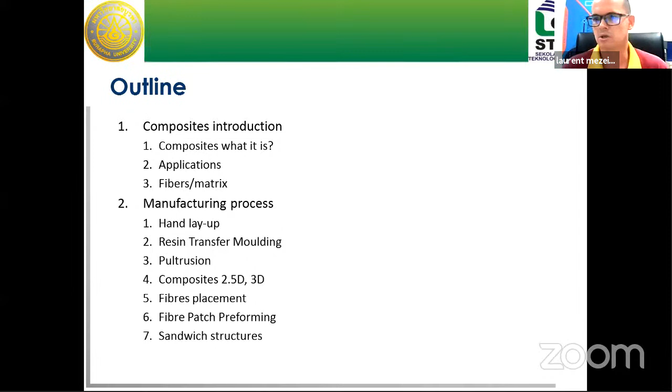So firstly, a short introduction of composite. So what is the composite and what is the meaning when we talk about composite?

So composite is a non-homogeneous material. It's a combination of different materials, but the speciality of composite is you combine two materials A and B, and in your composite, you can always see or distinguish component A and B. You don't merge them, you assemble two different materials.

And why do we do this? Because most of the time we want to improve the mechanical property and decrease the mass. In industry, mass is money. So it's very important to always decrease the mass of your product and improve its properties, mostly mechanical, but it can also be electrical property or cost.

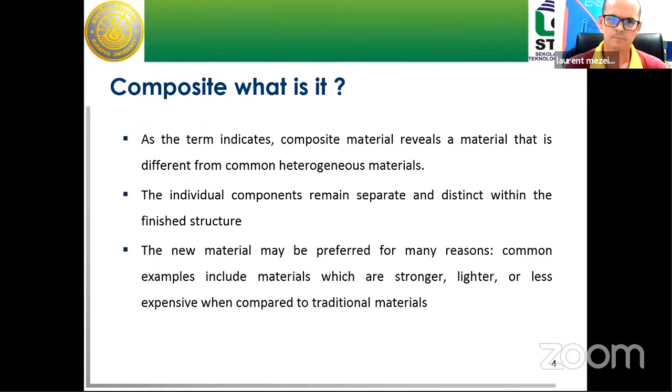Composite is not new. One of the most famous uses of composite in history is the Mongol bow in 1200 BC. Mongols already used composite to produce their bow. They used the appropriate material at the appropriate location in the bow to improve its properties. So composite is totally not new.

But in terms of engineering composite, the most famous composite is concrete. Concrete is cement plus aggregate, which can be crushed rocks, and rebar to reinforce the concrete. So concrete is a composite.

You also have metal matrix composite, MMC, mainly used in engines and machining tools. You also have ceramic matrix composite, CMC, mainly used in hot applications where temperature is very high, for example high performance brakes for sport cars or aircraft, or also in aerospace engines.

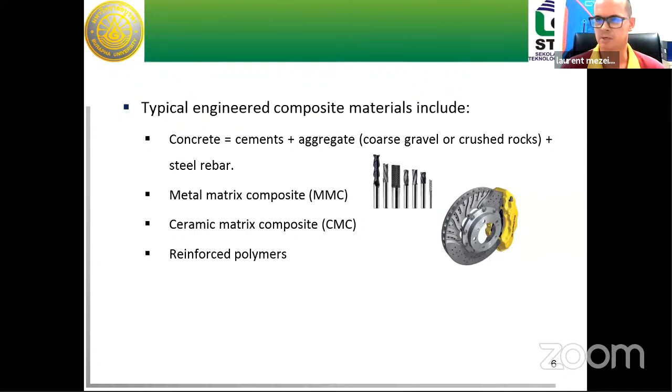And the last family of composite is reinforced polymer, which I will detail now. Reinforced polymer consists of one polymer, which I will sometimes call matrix, reinforced by different reinforcement particles. These particles can be long fiber, short fiber, or small particles.

So you have three types of reinforcement for the matrix. Today, in this presentation, I will present only the manufacturing process for long or continuous fiber. I will focus on this one: FRP, fiber reinforced polymer.

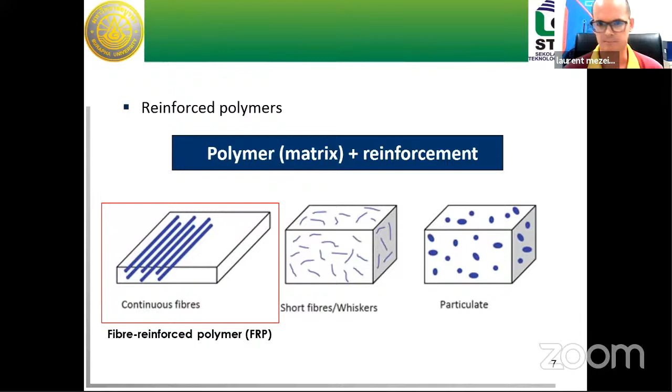You can see on this microscopic observation of fiber reinforced polymer, we have two components. Component A is the fibers, component B is the matrix. So the composite is made by these two components, fiber and matrix, but at the end you can always see component A, the fiber, and you can see the matrix. So you can distinguish the two components, okay?

What is the advantage of this type of composite, the FRP? It's light compared to metallic material, about 1.7 for the density compared to 7.5 for steel and 2.7 for aluminum. The ratio of strength over modulus is pretty high, higher than for metallic materials, because the density is very low.

And one advantage is that as you use fiber, you can choose the direction you reinforce. So you can choose the direction you want stiffness. So you can optimize your product.

The inconvenience or drawbacks are that it's more expensive than metallic. The manufacturing is very different, so you cannot switch from metallic process to composite process. It's two different worlds, and it's a little bit higher in terms of cost compared to metallic machining, traditional machining.

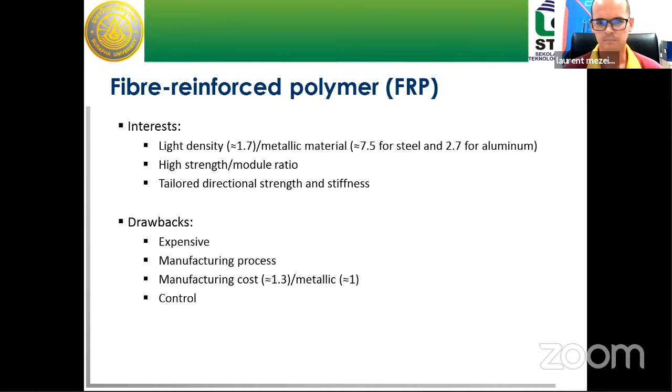Applications: basically, you can find composite in sport products, golf, baseball, cricket, surfboard. You can find it in transport, automation, bus, subway, train, automotive, sport automotive cars. Aerospace uses a lot of composite because it's very light and strong. And energy, especially for wind blades, for energy production, because it's light.

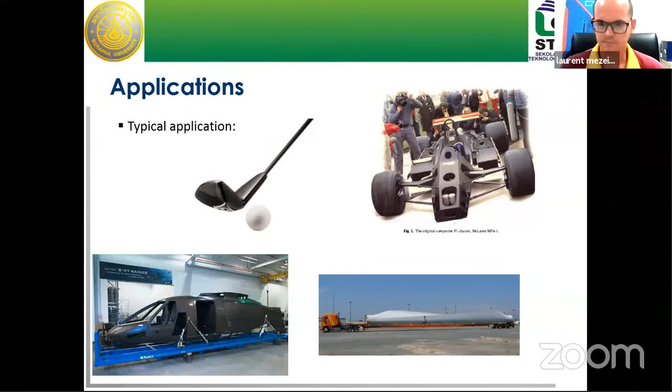Briefly on composite, the fibers used in FRP: you have three main fibers. Carbon fiber has a high mechanical property, so the strength is very high. It's mainly used in structural applications like aerospace fuselage, aircraft wing, sport automotive frame, applications where you need to save mass and be very strong, but the cost is also expensive for carbon fiber.

In contrast, you have glass fiber, really cheaper, with dielectric properties and excellent chemical and corrosion resistance, but the stiffness and mechanical property are really lower, really lower than carbon fiber. So glass fiber cannot be used in structural applications like aircraft fuselage, it's not strong enough and it's too heavy, but glass fiber can be used in cheaper applications.

And the last fiber is aramid. The commercial name is Kevlar. So Kevlar is the commercial name, the product is aramid. Aramid fiber is very good for impact, so it's very tough. For all applications where impact resistance, chemical resistance, and fatigue resistance are required, aramid fiber is a good candidate.

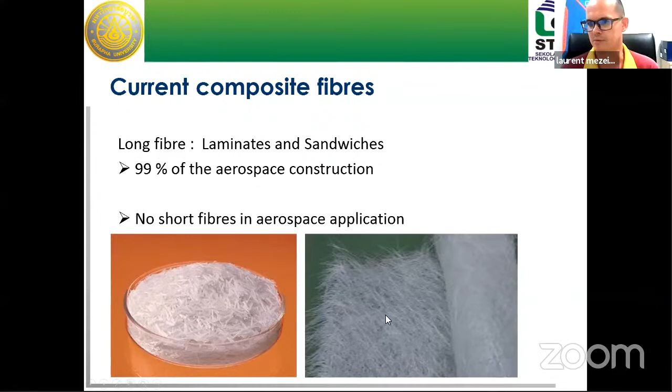In terms of fiber, you can find long fiber or short fiber. Long fiber is mainly used for structural applications, so aerospace uses only long fiber. Short fiber, as you can see on the left picture, is a few centimeters in length. This is glass fiber, the white color. The mechanical properties are very low, so it's basically used in a swimming pool. So application where property is not the key.

Something very important in fiber reinforced composite is the different scale from the fiber to your final product. The basic element is the filament, and the size is in micrometers. Typically the diameter of the filament is 6 to 10 micrometers, so it's very, very small.

Then you combine this filament to obtain a yarn or tow. This is a product you can buy commercially. It mainly consists of 12,000 or 24,000 filaments, so this yarn is made of thousands of filaments.

Then you combine this filament with a polymer to obtain a ply, like a sheet of paper - you have yarn, multiple yarns, surrounded by the resin. This ply is very thin. You assemble many plies to create a laminate, because the ply alone is too soft to make a product. So you need to assemble many plies to obtain a usable product, and this is called a laminate.

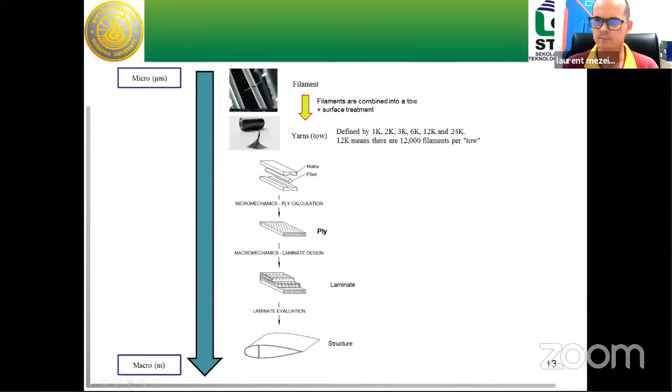The ply is commercially available, and you have two types. You have what we call unidirectional or UD, where the fiber, the yarn, is in only one direction - all the yarn is in the same direction. And you have another product called woven or fabrics, where you have two directions of fiber, what we call 0-90 degree. So unidirectional is one direction, woven fabrics is two directions of fiber or yarn.

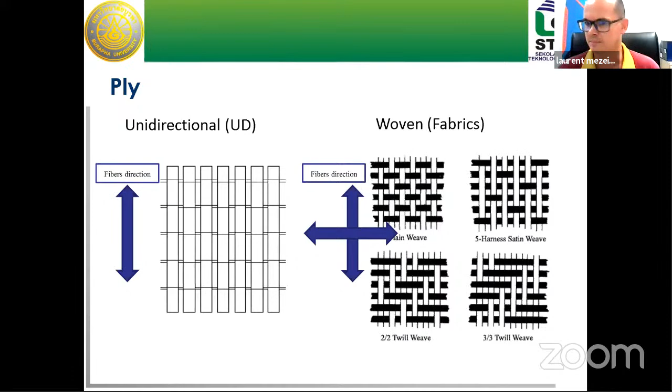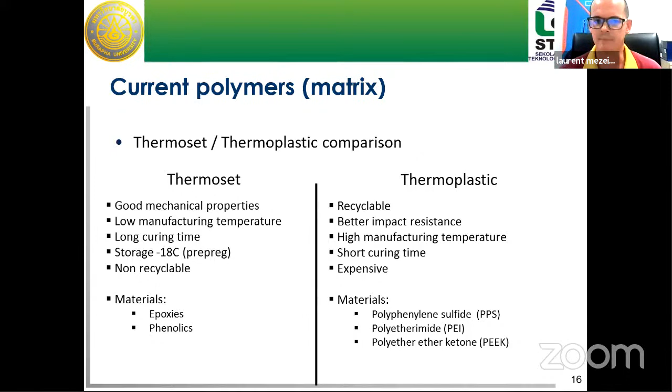In terms of matrix, just one slide - you have two big families: thermoset and thermoplastic. I won't detail more than this. Thermoset is mainly epoxy or phenolic. Epoxy has very good mechanical properties, so it's mainly used in aerospace or automotive. The manufacturing temperature is pretty low, but the manufacturing time is pretty long. Storage is a key point - you need to keep prepreg at minus 18 degrees, so you need to store your raw material in a freezer, and it's not recyclable. Once you have your part, you cannot redo or reuse it.

At the opposite of this, you have thermoplastic, and the first point is you can reuse thermoplastic. So you can produce your part, and after producing, you can reproduce your part, recyclable, but not many times - 3 to 4 times. They have good impact resistance. For manufacturing, the temperature is very high compared to thermoset, but the curing time is very, very short. But one drawback of thermoplastic polymer is it's very expensive today, so its use is limited.

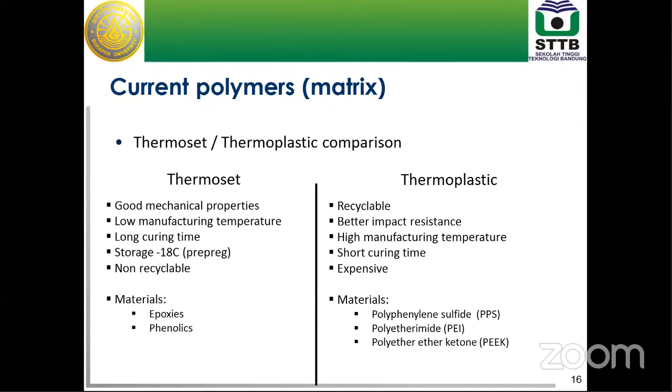You need time and temperature to cure your polymer. So the polymer you have is liquid, it's viscous, and you need time and temperature to make a solid. So to illustrate this, I will show you the curing cycle.

The curing cycle for polymer is the temperature profile through the time. Here you have the temperature in blue, in function of the time. We have 3 steps. You heat up your product, you hold the temperature at the temperature required by the manufacturer, in this case 180 degrees, then you hold this temperature for a few hours, and then you decrease the temperature, you cool down your part, and you obtain finally your product.

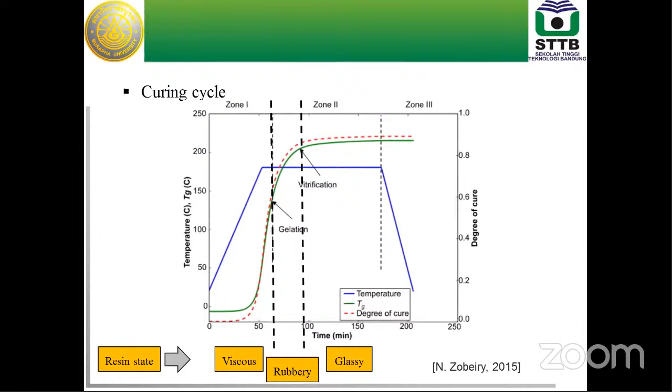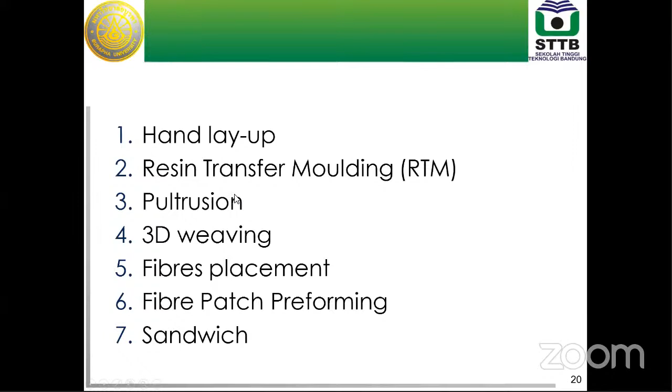So all the manufacturing processes in composites need time, temperature, pressure. I will review 7 processes if I have time. We will start with the most common process, the hand layup. I will detail this one, and for the others I will go faster and show you the main point.

So hand layup is the most common manufacturing process, using 3 different types of temperature and pressure application: autoclave for 7 bar pressure, out of autoclave meaning oven where you just apply temperature at atmospheric pressure, and press for pressure higher than 3 bar.

So hand layup, I divide it into 4 steps. Step 1, you need to prepare your mold, which gives the shape of your product. Then you do the layup, meaning you apply the plies. Then bagging and curing time - curing time is the graph I showed you before, so you apply temperature at the right time and for the right duration.

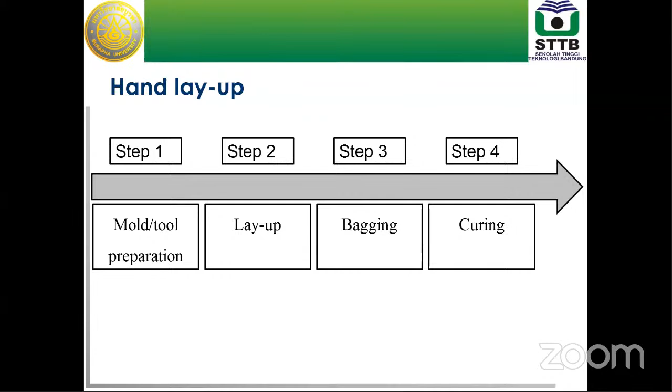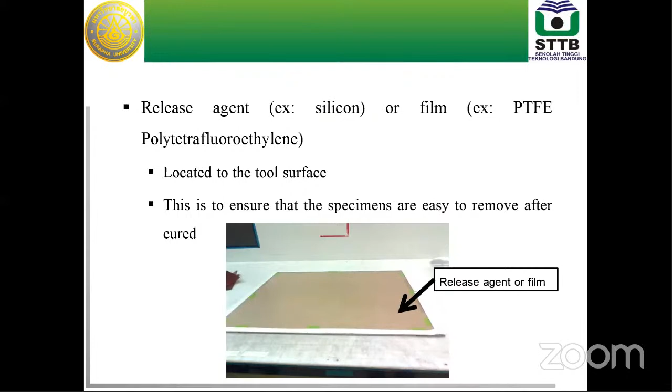So the mold in this case is just a plate, a basic shape. You clean it, you apply your release agent to avoid bonding. Then you apply your plies. The plies, in prepreg form, are protected by backing films to protect the ply.

So you put your ply on your mold, you remove the backing film, you apply the second ply, remove the backing, the third ply, etc. So you build your laminate. Remember, a laminate is a combination of many plies. So in this step, you create your laminate.

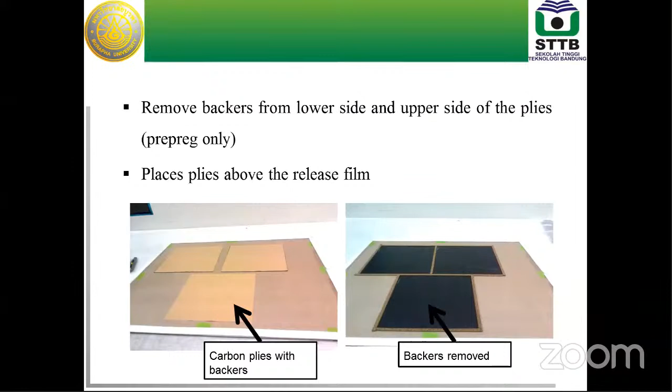So when you have the number of plies you want, you apply what we call a release film - a solid or perforated film. This is to avoid the resin flow. You want the resin to stay with the composite, with the ply, because you want to reinforce your ply. So this film is to avoid the flow of the resin.

Then, it's optional but better - in aerospace you need to consolidate your laminate, meaning when you have many plies, 3, 4, 5, 10 plies, you need to consolidate. So you apply a pressure, not a high pressure, just a few bar for a few minutes, 2 to 5 minutes, just to assure good conditions during the compaction.

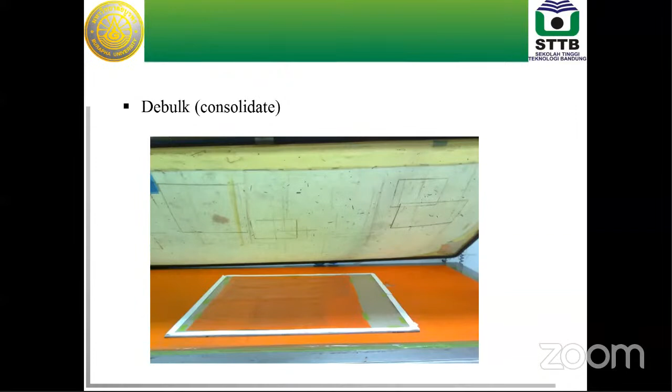Then you apply a breather. It's a very thick, porous tissue, and this tissue is made to absorb the resin. In case you have too much resin, this tissue can absorb that excess resin.

So here is the breather, it's a white tissue, and you apply the valve. The valve connects the pump to make the vacuum, for the pressure. You need to apply extra breather at the vacuum area to avoid the resin flowing into your pump. If resin gets into the pump, you will damage it and your production will stop. So you need to protect your valve.

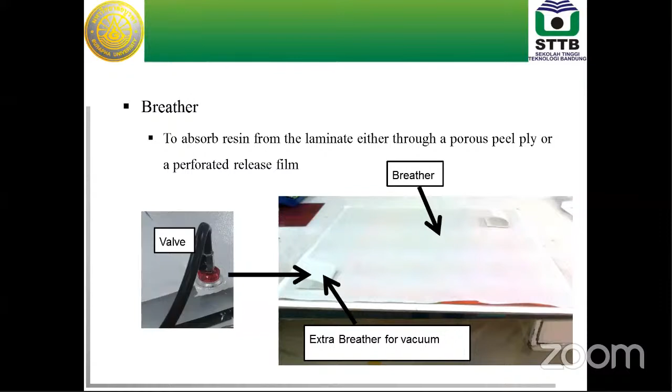Finally, you close everything with a bag, so it's a bagging step. The bag is sealed with a sealant tape, as you can see here, the yellow tape. So you close your mold. In this case, it's a simple plate. You apply your bagging on top of this, and you apply the vacuum here. As you can see, you have the vacuum input here with a valve.

The last step before curing is a leak test. So you check you don't have porosity in your process, and that the pressure is well applied. You apply 1 bar and check if the pressure is well applied. And if it's okay...

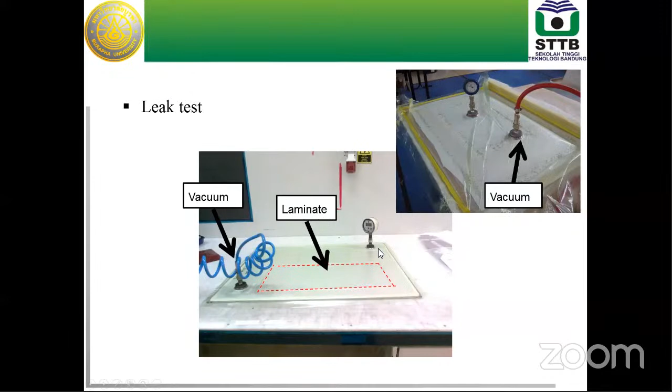The interest of the autoclave is that the pressure is very well applied on your surface, so you have a good repartition of the pressure. You have a high quality product using autoclave, and the mechanical property is very high, so the performance of your part is very, very high.

The tools are pretty cheap and light. And you can do a large panel of structure types and shapes, so it's very flexible to make many types of parts - flaps, spoilers, automotive parts. You have many examples like this.

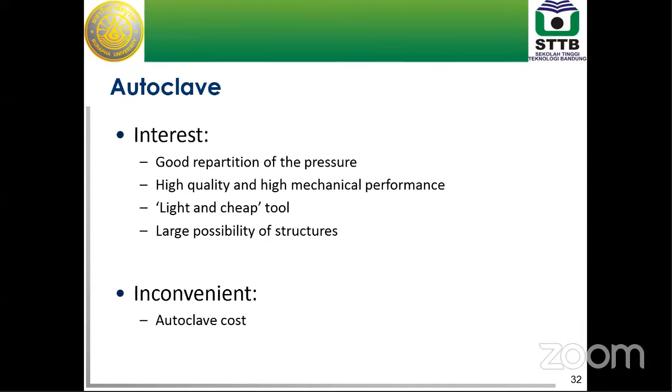I would like now to jump to another process called resin transfer molding. So what is it? Resin transfer molding, RTM, is when you impregnate a reinforcement with polymer. You have the shape of your part made with a fiber, carbon fiber for example, but no resin - just fiber. Then you impregnate your shape with the matrix, and then you cure your part, meaning you apply the curing cycle: time, temperature, pressure.

So I will show you first the preform, the shape of your part. In this RTM process, the first step, you use the dry fiber. Remember I talked about prepreg and dry fiber - in the RTM process, you use dry fiber.

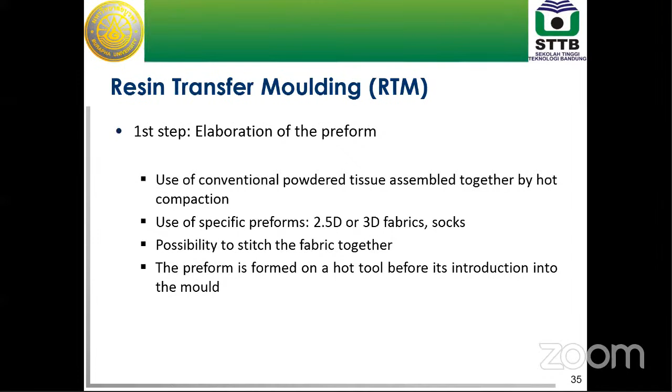You can use UD woven, but you can use more advanced fiber, 2.5 or 3-dimensional fiber, which I will show you in another slide. You can stitch the plies and fabrics together to create a 3D tissue. Most of the time you create this shape in a hot mold before putting it into the final mold.

And then you apply the RTM process to apply your resin through your shape. So when I talk about preform, this is it - the shape of the part, but only fiber, no matrix, no resin.

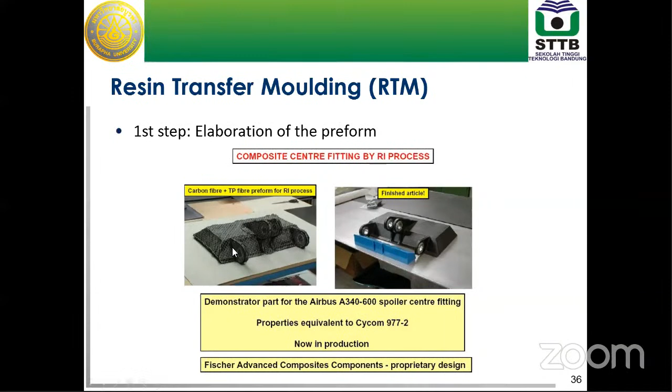So you create your part, and then you need to apply the matrix, the resin. You have three types of application: closed mold, liquid resin infusion, and resin film infusion. I will detail one by one and show you some video to illustrate the process.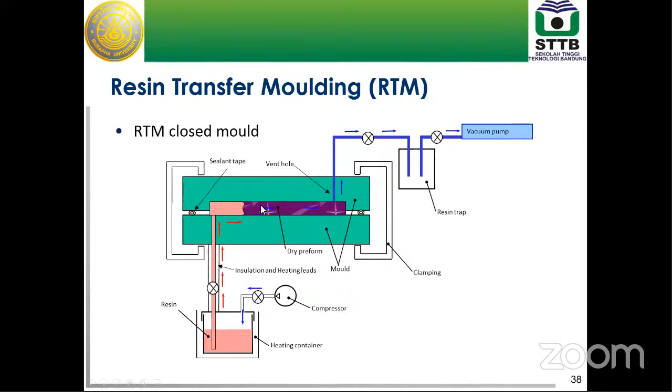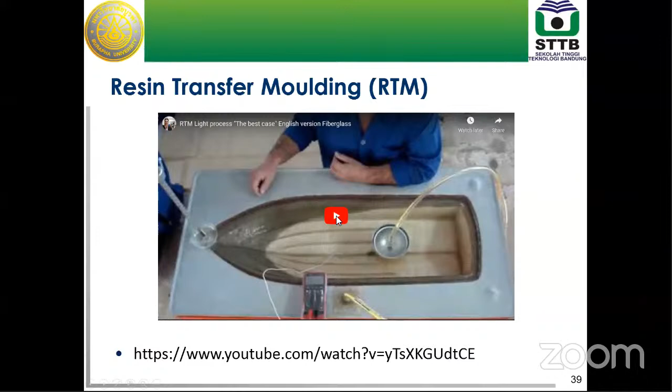I will show you a video to illustrate how it works in reality. I will just skip the beginning because it's not important.

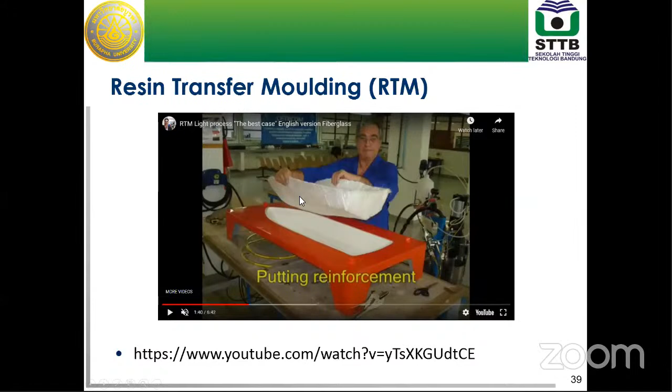Okay, let's start. They apply the release agent first. As you can see, this man carries in his hand the fiber. This is the fiber, but no resin yet, just fiber. This is the preform. They will install the preform in the mold.

As you can see, it's a small boat, I think for the school. If they have too much fiber, they cut it. So you already have the shape of the boat made by fiber.

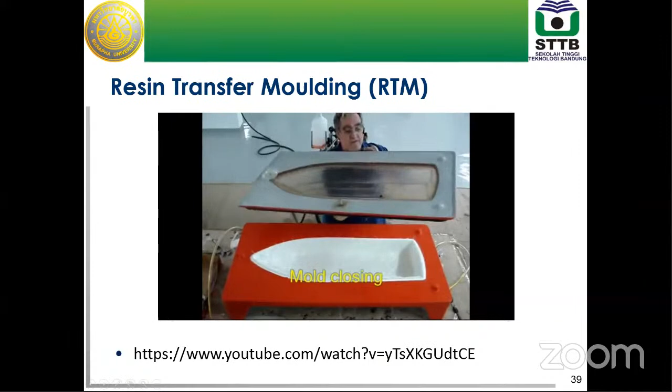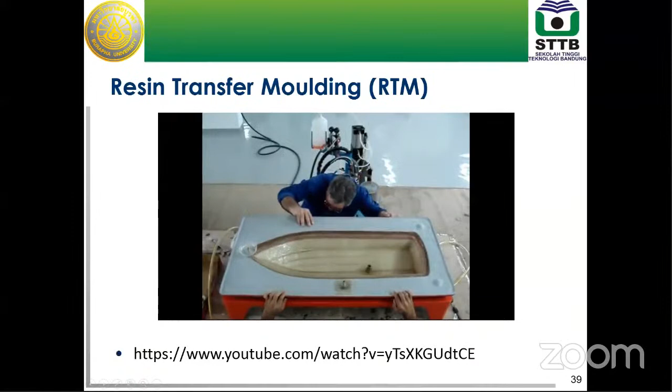Let him cut. Okay, they close the mold. Remember I said upper, lower mold - this is the upper side. They close the mold of the boat. Vacuum - the pump is connected at one extremity to create the vacuum. And they test, this is a leak test, which I mentioned before. They check if the pressure is well applied everywhere.

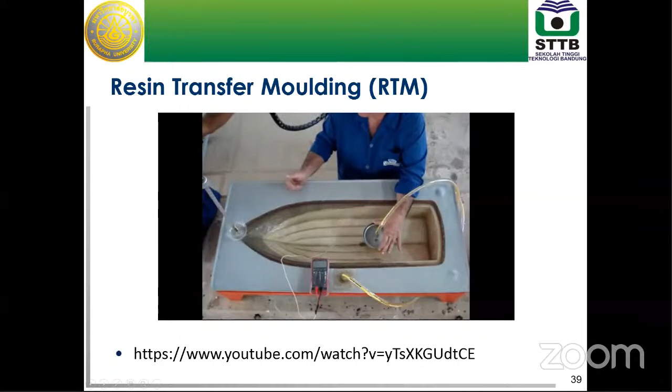Now they will connect the resin injection. You see the resin up - the vacuum pulls the resin through the fiber. You see the color? With glass fiber, it's easy to look. So we have the resin moving through the shape of this boat.

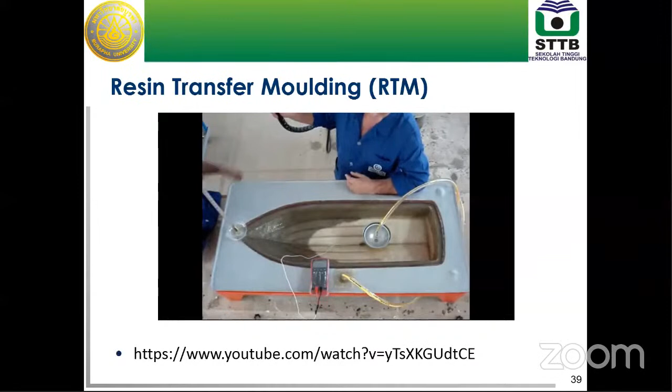For a small shape like this, you have only one resin injection point. For a very large part, you can imagine hundreds of resin injection points. You can see the flow of resin move, and it finishes after.

The advantage of this process is the quality of the surface is pretty good. You control the geometry, the thickness of your part is well controlled. And you can integrate function in your preform - when you create the preform shape with the fiber before the resin, you can already install some function, like metallic reinforcement parts if you want.

But the inconvenience is the molds are pretty expensive. For example, for the spar, the molds are complex to do and must be carefully designed. So the design and development of the mold is pretty complex, and in terms of volume, you are limited in terms of size.

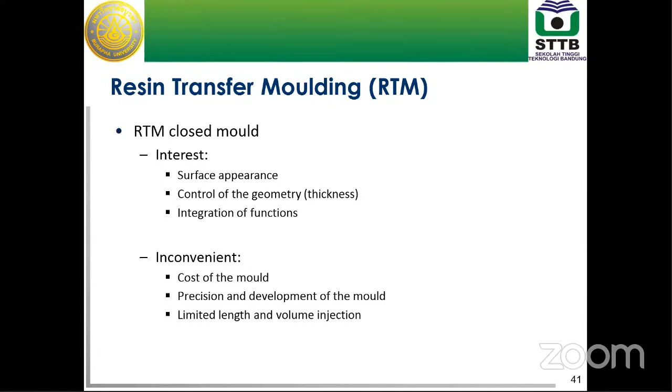The second process, I'll go faster because the idea is exactly the same. Liquid resin infusion - same thing, exactly the same as before. The only difference is the resin follows the surface of the lower mold first, goes through the surface, and then through the thickness. So in two steps: first follow the surface, then through the thickness. But this is the same idea as before.

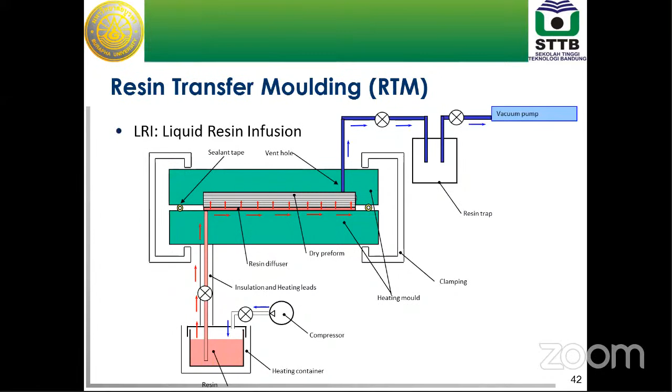The advantage of this design is you can do bigger parts, but it's more difficult to control the quality. So the previous process obtains a better quality part - this one is more advanced.

The last one for RTM is resin film infusion. As you can see, it's like autoclave - you find exactly the same thing. Green color is the mold, release agent, you apply resin film, and then dry preform, the fiber with no resin. The process is exactly as the hand layup process I showed you, except the first step is you put a resin film and then you put your dry fiber. Then you have release film, breather, bagging, and you apply pressure as before. By applying the pressure, the resin in the film goes through the thickness.

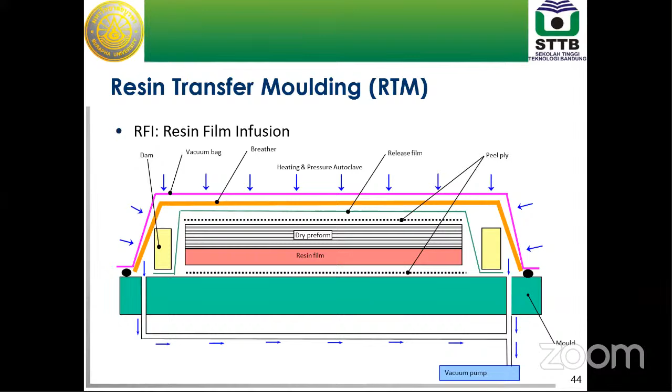The advantage of this last process is that the tools are very simple, so the cost of the tool is really lower than the two others. You can do a very large part, depending on your autoclave size. But the problem is you need an autoclave.

And if you have an autoclave, prepreg as before is certainly better. So for RTM, this will conclude the RTM process.

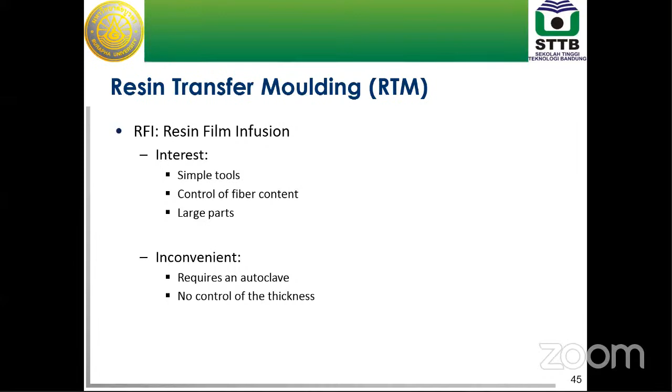Just to show you, RTM can do a 60 meter wind blade for wind energy, with 5 tons of resin injection. So RTM, you can do a very huge part.

Now I would like to go on to some more specific processes, very specific for some applications. I will detail each one briefly, giving you the principle, advantage, inconvenience, and each time I will show you a video to illustrate.

So pultrusion is a process to produce beams. Like in this picture, you produce beams. So the concept is the following.

First, you have the reinforcement, the fiber, and the yarn. You remember the yarn filament? You combine filaments to obtain the yarn. So one yarn is made of 20,000 filaments.

You pull the yarn through the die, giving the shape of your beam. You heat it, which is a curing cycle. Then you have the pulling system to pull the fiber, and finally the cutting operation to cut your beam. I will show you a video to illustrate this process.

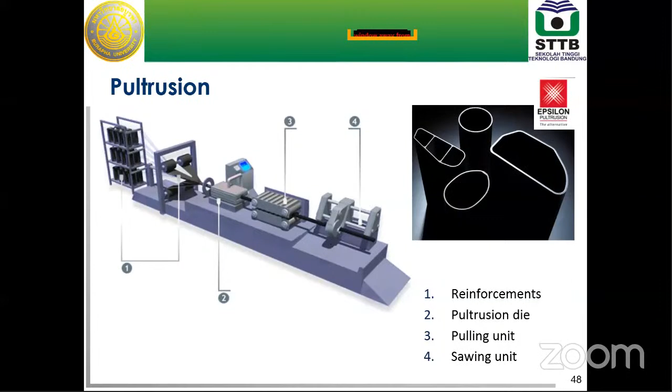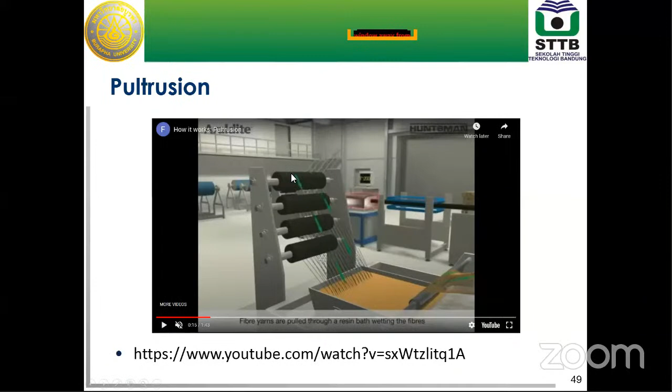So pultrusion, it's a 3D video of a production line. As you can see, we have the yarn, this is a bobbin of yarn. In this case, it's a carbon yarn. The carbon yarn is pulled.

The yarn goes through the resin, the polymer, so you obtain the yarn with the polymer. The yarn goes through the die, given the shape you want. In this case, it's a simple circular shape.

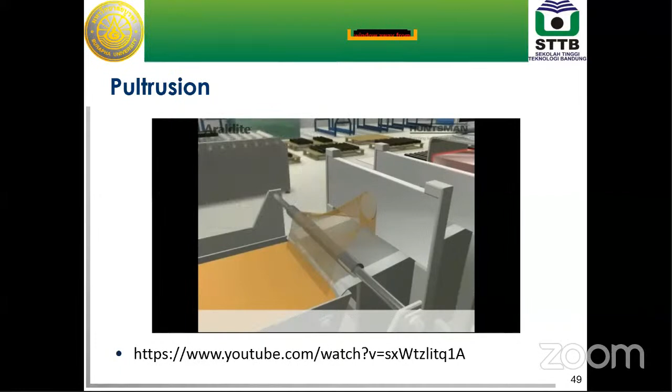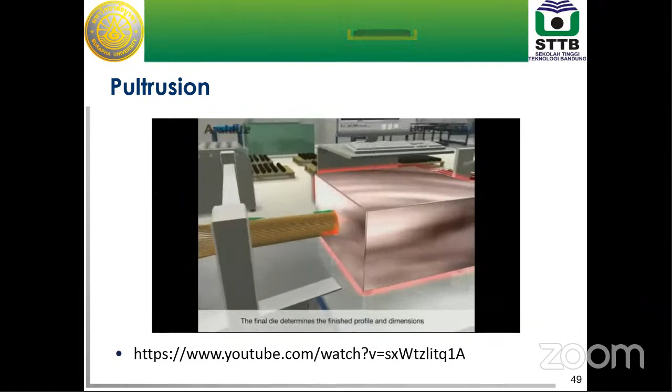You do the shape in many steps, not in one step. Then temperature and time, this is a curing cycle. The fiber goes through the curing oven, and of course the temperature and time are calibrated, matching the curing cycle.

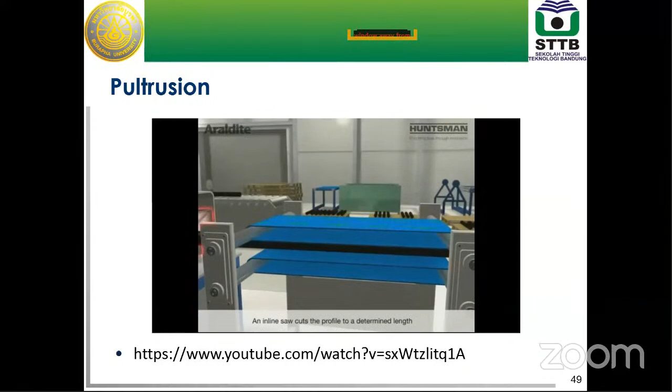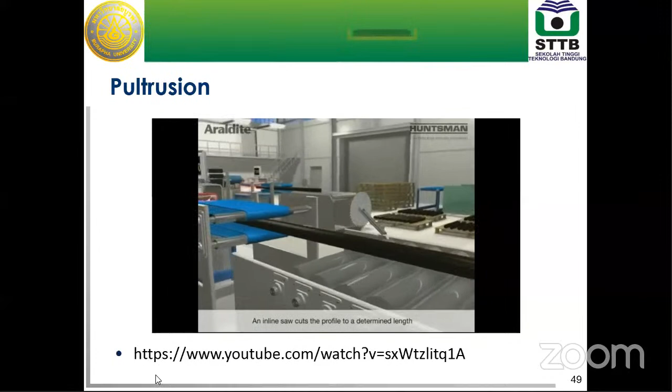Then you have the pulling system, pulling your beam. And finally, you cut, you cut the section you want. And you obtain hundreds of kilometers of beam.

So this process for composites is very interesting because, as you can see on the video, you can produce with a high manufacturing rate. It's a continuous process. You produce the shape you want, as seen in this picture, the beam shape. So you can create very complex cross sections.

And the mechanical property of this type of composite is very high because you pull the fiber, so the orientation of the fiber is perfect. It's very impressive in terms of mechanical property.

But the inconvenience of this production is you produce the beam continuously, so you cannot change the shape through the length. You must always create the same shape. You cannot reduce the section and then increase it; it's always the same section.

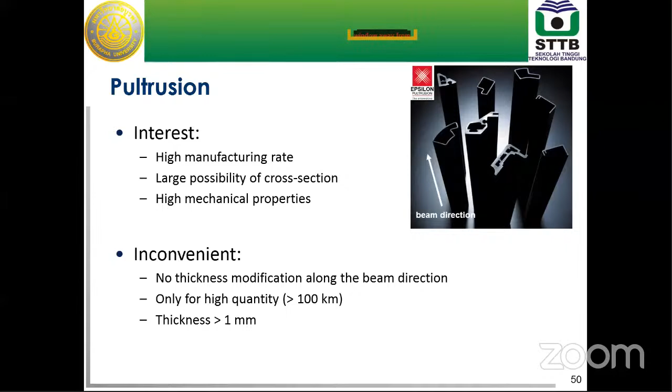One picture of application, this one is in thermoplastic. It's a rail fixation used in aircraft, a fixation beam along the fuselage in the cabin. It's very long and made by pultrusion. The shape, the section of the beam, is made by pultrusion because the shape is always the same section, so the process matches this application.

I talked about 2.5D and 3-dimension composite before, and I would like to introduce you to what it is. Composite, as I showed you, is made by ply, like a sheet of paper, so you have no fiber through the thickness, just fiber in the plane. So 2.5/3-dimension composite is a process to have fibers through the thickness.

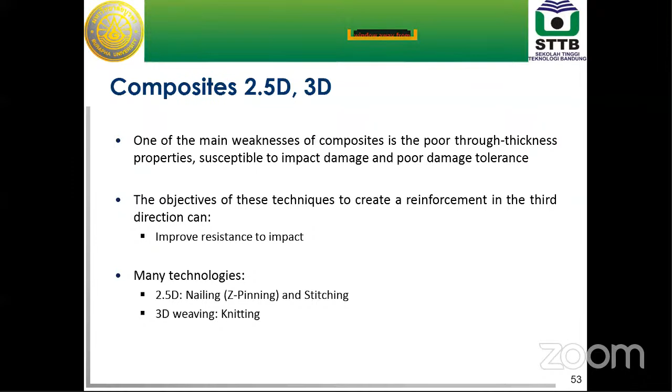There are many technologies to do this. I will not review everything. It comes from textile technology, and for our interest, we focus on the 3-dimension ones. You have different technologies: weaving, braiding, stitching, knitting. It's a textile technology.

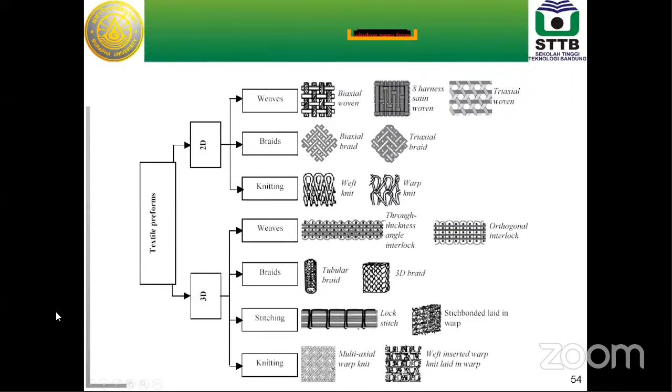I will show you quickly some of them. The first is stitching. What is stitching technology? You have continuous fiber on top and bottom surface of your ply, and you lock these two fibers together. You can lock with different patterns, following this picture, to reinforce through the thickness.

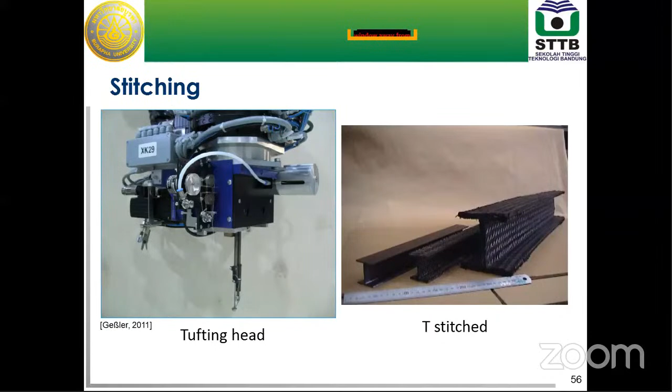I will show you a video to illustrate. So we have different plies, I don't know how many, maybe 5 or 6 plies of carbon. They add fibers through the thickness of all the plies to reinforce. It's a knitting process, a textile process. They can go faster, but here they go slowly, to reinforce through the thickness.

The advantage of stitching is that it's pretty cheap. It's a textile technology, and you reinforce through the thickness of your composite, which improves the toughness. But this is the drawback: you can also lose some strength of your composite in the plane. So you need to balance it depending on your property needs.

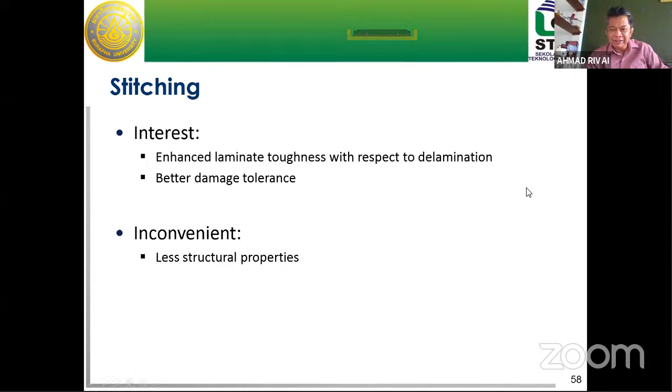For the last 5 minutes, I will just show you very quickly the last process: braiding. Braiding is very complex and very difficult to explain, so I will show you the video, because it's very, very strange. So braiding, what is it?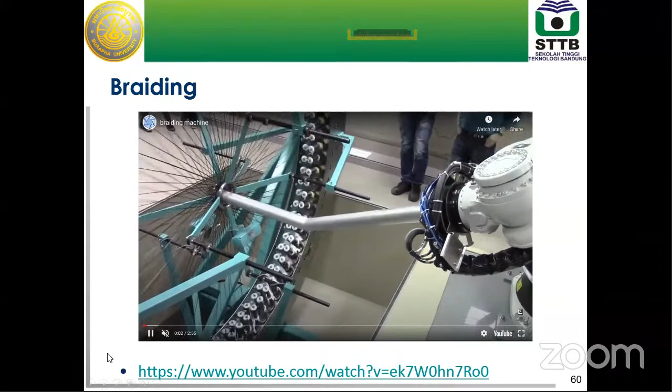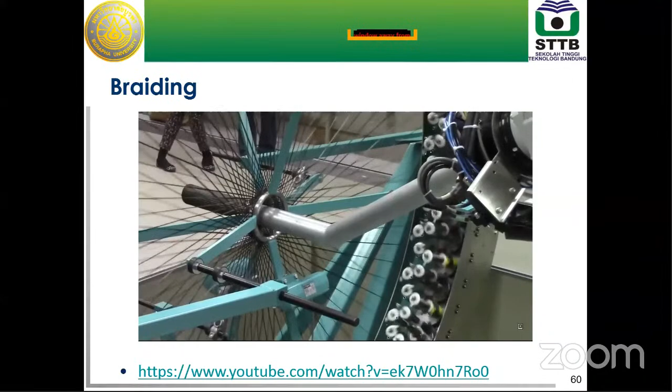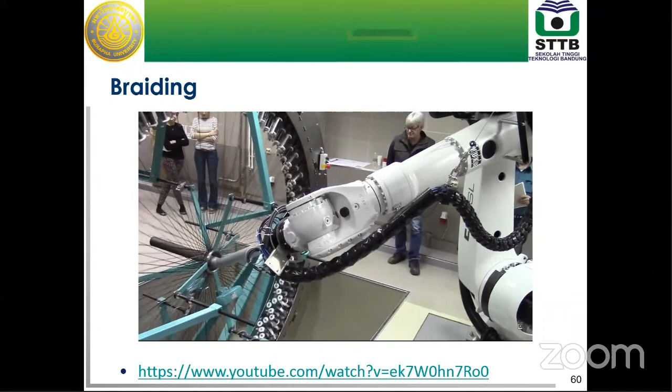This is the technology. You have the mold, here it's the beam. You apply fiber, the yarn, many yarns as you can see, through your shape. The process never stops. It's made so the fibers always go one top, one down, one top, one down. You can create this, you see, it's pretty fast. In a few seconds you can do 1 meter of composite.

The robot will move up, never stopping, and you can create a long, complex profile. With pultrusion before, you could do many kilometers, hundreds of kilometers, but always the same profile. With braiding, you create the profile you want, and you can change the profile during the process.

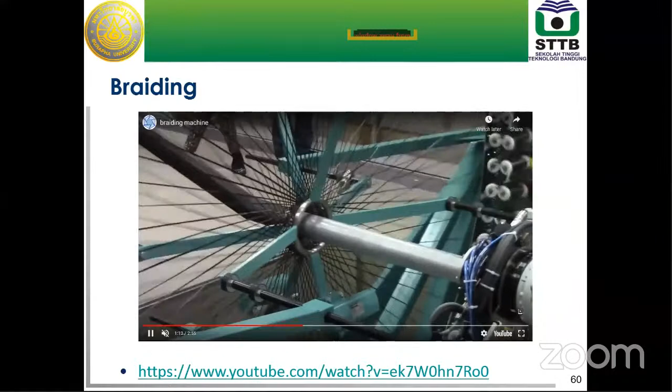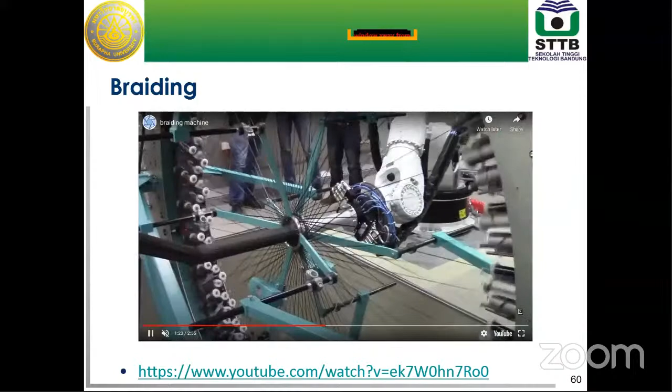It's hypnotic, very beautiful to see. You cannot see the fiber finally, it's too fast. As you can see, no resin, dry fiber, this is a dry yarn. So you need to use the RTM process afterward. It's very beautiful, the front of fiber moves continuously.

The advantage of this process is that it's very fast. You don't lose material, you apply only the fiber you need, so you don't have scrap material. You can go pretty fast, create the shape you want, and change the shape during the process. So it's flexible.

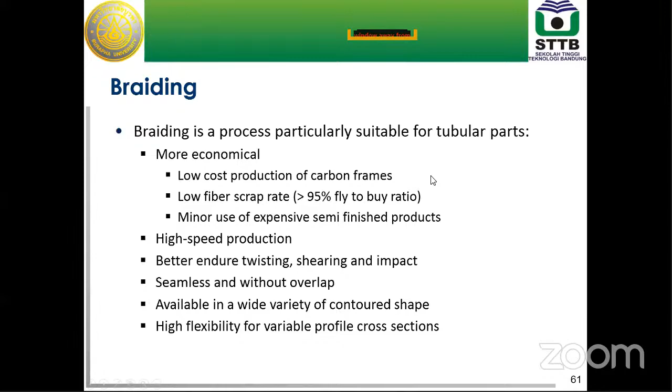I will skip some processes because the time is short, and I will go on.

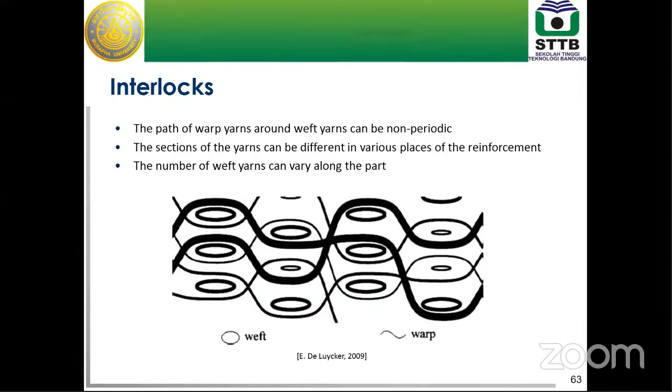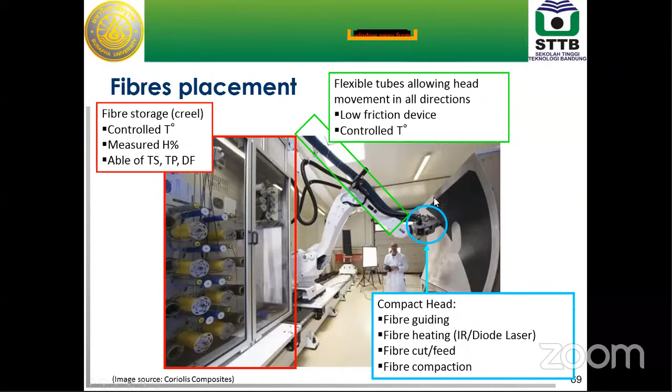Fiber placement is used in aerospace. It's a robot technology to automate the production of composite. You have two technologies, but the same idea. Fiber placement is a robot that applies the fiber following the shape you want. In this case, it's a fuselage. You see the fuselage with, I think, the aircraft window location here.

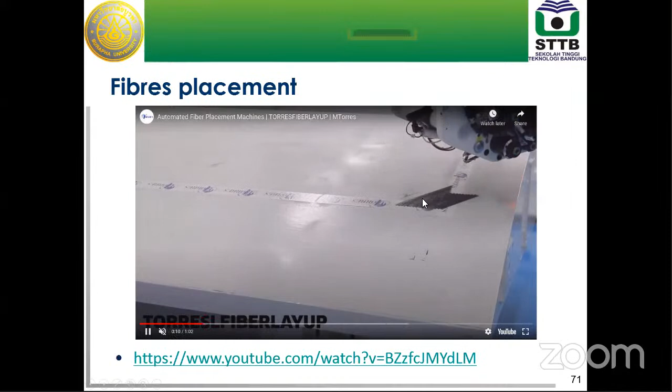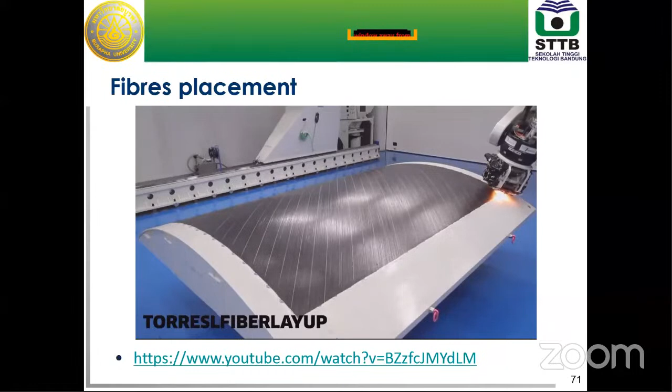A movie is better to show this, so I will accelerate. This is a typical application: you have the robot here, and it applies the fiber, which already has the resin in it. So you have fiber, resin, and the robot applies pressure. You need pressure to make composite, so the robot applies pressure and temperature. You can create the shape you want, even complex shapes. You see the temperature shown with the light, and they will zoom in to show you.

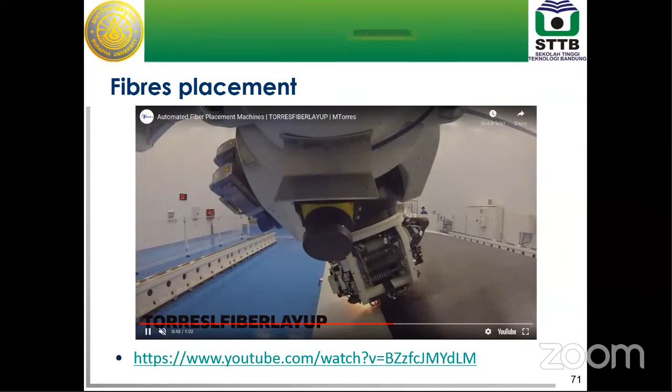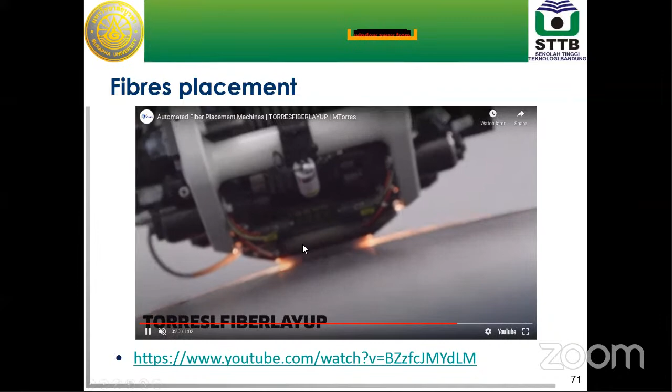And we can see the temperature, and I want to show the roller to apply the pressure. You need to apply pressure always in composite. So this uses Prepreg. It's Prepreg technology, used for high standard parts, mainly aerospace.

I don't know what time I have, how long I have left. Usually it's finished, okay, perfect. Thank you very much, Dr. Laurent. I think it's very interesting for us to attend your lecture. I think next time we'll come again and you will finish your presentation. Yeah, I will do another one, with pleasure.

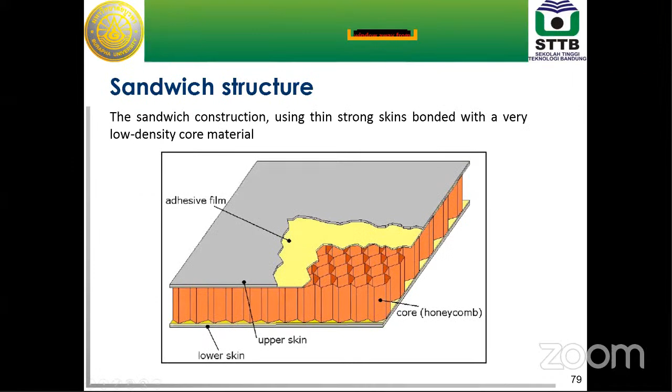So I think there are so many questions from the participants in their mind. I think we already have 3 questions. You can look on the chat. Where is the chat? I think you can directly respond to this question. I need to find it, sorry, huh? Where is the chat? In the bottom of your Zoom. Okay, where's chat? I will stop sharing, okay, stop sharing. Okay, chat, where is the chat? I'm sorry, huh? Chat, yeah, 12 questions, okay.

Okay, the pressure. So for the first question, you have different types of pressure. You can use air, so an air pump, or you can use a press, so mechanical pressure with the press. So you have 2 types of pressure: it can be the pump or the mechanical pressure.

So for the curing cycle, tight inspection efficiency, quality management in composite manufacturing - the second question is about this. For quality, it depends on your process, of course, and also on the industry you work in. If you work for aerospace, automotive, or sport industry, the quality process and manufacturing process are very different.